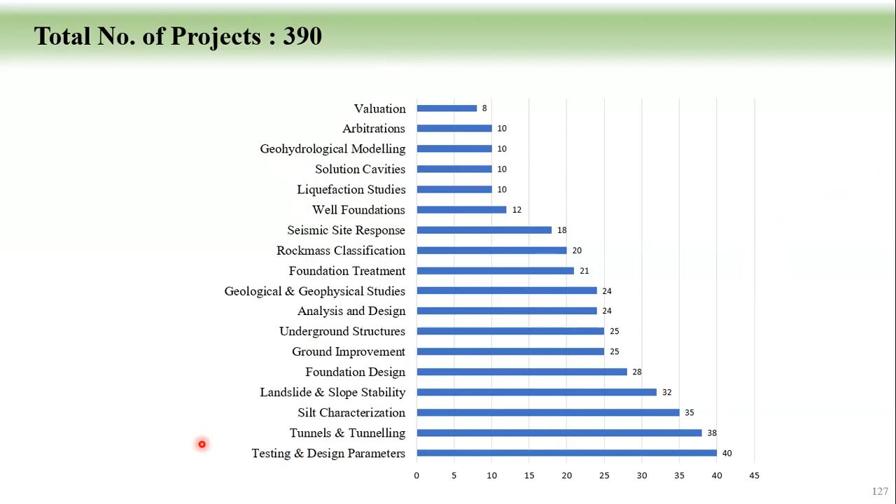This is roughly giving how our time is actually spent on different projects. I'll take maybe 4 projects here: stability of Chenab bridge abutments, Subansiri powerhouse slope stability, integrated effect of seismic and rainfall landslides in the Himalayas, evaluation of bored tunneling practice for Delhi Metro, and coupled hydromechanical modeling of slopes in the upper catchment of Beas in the Himalayas.

I will see it there, but I will definitely be closing it by 1 o'clock. So that ends my presentation in this segment. And if required, I will take it up in the second segment, or maybe we can close it there with this.

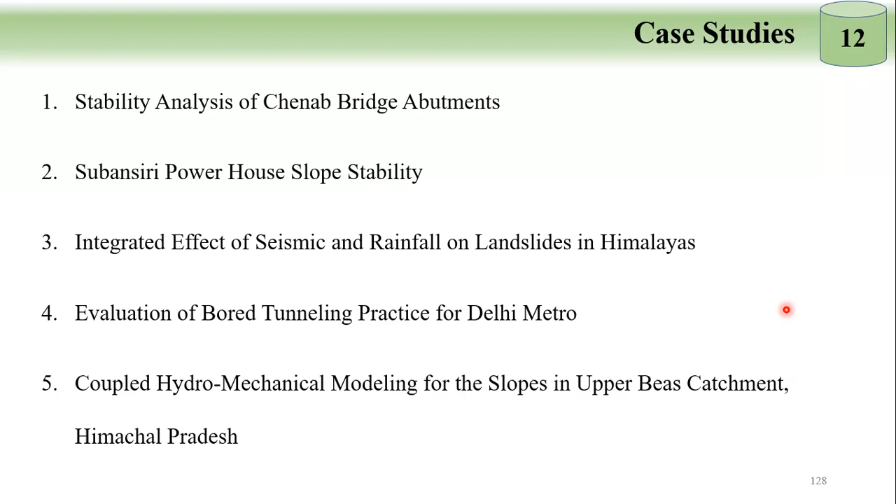So these are the case studies. Case studies are always very interesting. As you know, the Chenab is our mighty river, and across that, a bridge is supposed to be constructed by the railways.

The valley is getting connected with the train from Jammu to Baramulla. In between, you have Banihal to Baramulla where trains are already running. But from Jammu to Banihal, in between, you have this river called the Chenab. Across that, you need to have a bridge.

So this is the Laole end, and then this is the Katra end. From Jammu is this side, and when you come through a tunnel, you will be entering into the bridge. There are hundreds of bridges and hundreds of tunnels being constructed here.

This is the mighty river Chenab, and a tributary to the Chenab is the Anjikhad. The Anjikhad valley is also this - it is a tributary to the Chenab. Here also, you need to have a bridge.

Originally, both are actually planned as arch bridges. In arch bridges, you don't have any supporting piers, and there is a viaduct part, and then there is an arch. The arch foundations are coming here, which I call P50, and then this is P40.

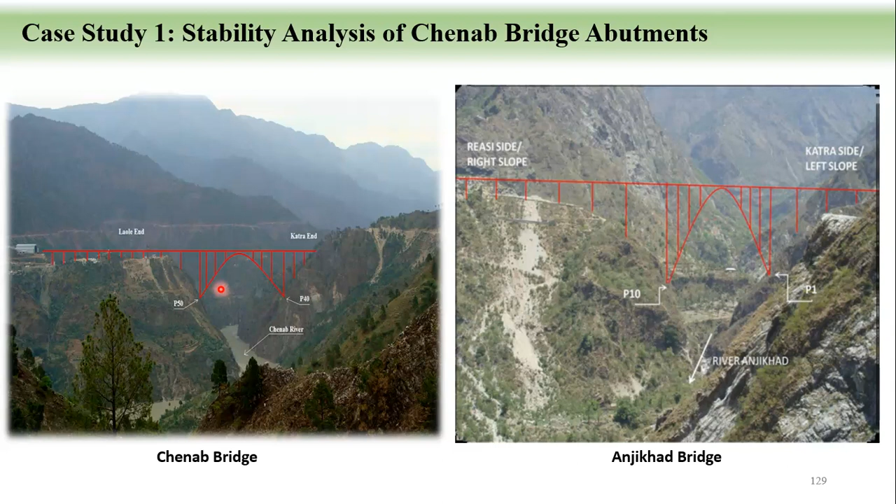Both the bridges were originally planned, but this bridge is now a cable-stayed bridge - they made it that way. I'm not going to talk about the Anjikhad, but I'm going to talk very briefly about the Chenab.

So that's what actually the Katra, Jammu-Katra route is, and that is the Chenab crossing. This particular bridge is coming here. And I also said that the Banihal off route is still yet to be opened. Hopefully, if these two bridges are done, this will be a continuous journey from Jammu to Baramulla, cutting across.

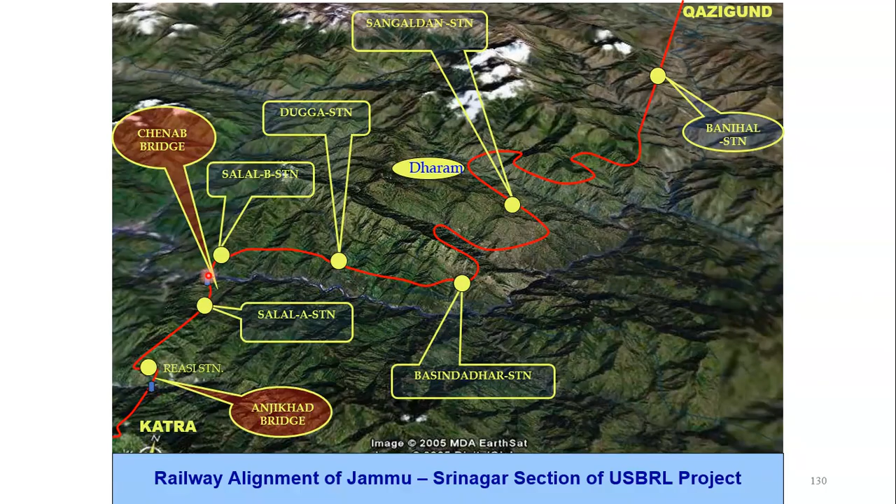So the specialty is this. You see the Eiffel Tower, it is about 324 meters, and this bridge is even higher than the Eiffel Tower. From one end to the other, it is almost 1.5 kilometers.

From abutment to abutment arch abutment, from there to there is a little more than half a kilometer, that is 505 meters, which is the width here. The total height up to the water level is 359 meters. It's mind-boggling, even compared to the Eiffel Tower.

Some of you might have seen the Eiffel Tower in Paris, and that is only 324 meters, while the deck to water level here is going to be 359 meters. Imagine traveling on the valley and looking down 359 meters, it is a thrilling experience.

So this is going to be the highest arch bridge in the world, and the second highest is going to be the Anjikhad bridge. Both these bridges are very unique.

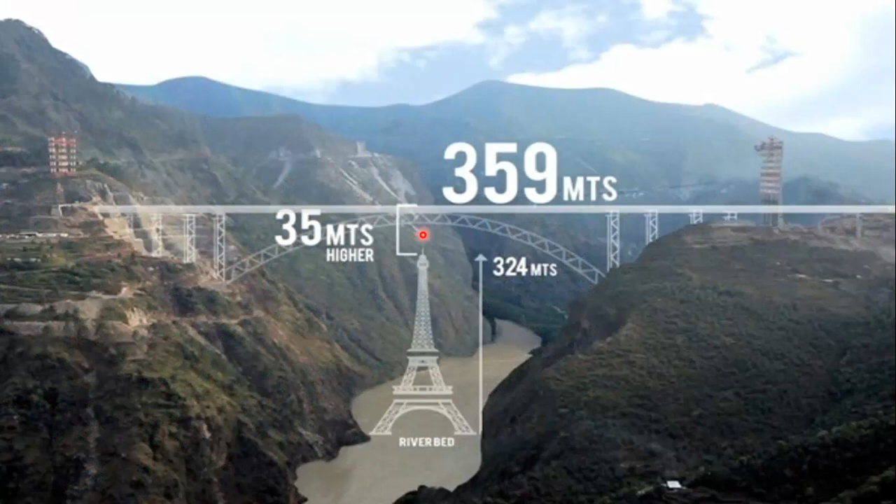Now of course, the earlier diagrams are all hypothetical, architectural renderings, because the bridge is not yet fully completed, and I will show you the present scenario. But when we enter, this is the scenario.

It is a viaduct part, on the right side the river is going down, and the arch is going to come from there to there, something like that. There are drifts which are actually created, and we captured what the bottom formations look like. This is the downstream side, and on the downstream side, the foliations of this rock are visible.

The rock present is dolomite, which is magnesium calcium carbonate. It's a very good rock, but it has a lot of foliations.

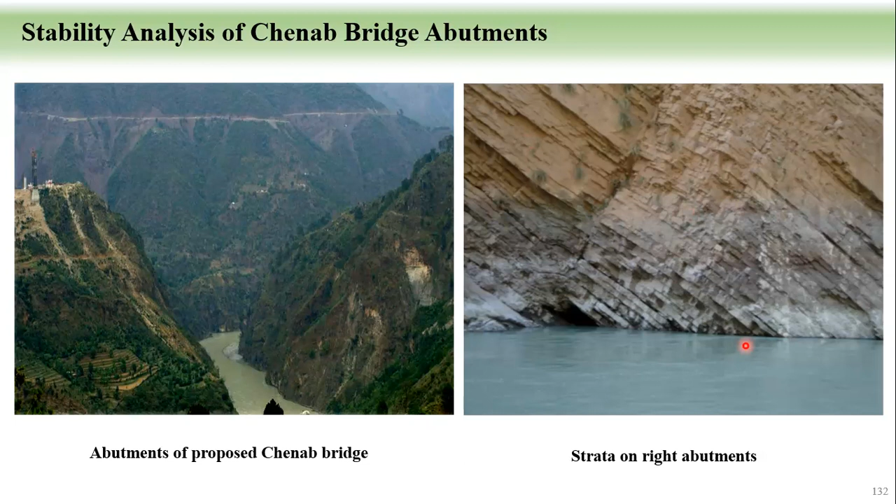As I said, the foliation plane is one joint, then J2 and J3. This is one set of joints, this is another set of joints, and each will be playing a different role. It is very rough, so the friction will be very high here, whereas J1 is very smooth.

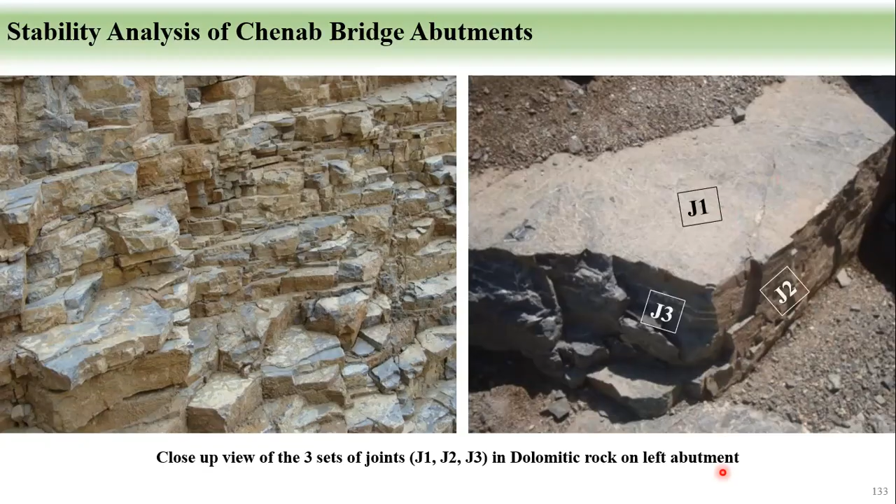The issue here is there was a controversy when the bridge construction was actually going on in full swing in 2008, and suddenly it was halted because somebody said the bridge is unsafe.

The global stability of the slopes was not done through discontinuum mechanics. Those knowing numerical methods know there are two branches: continuum mechanics and discontinuum mechanics. In continuum, most of the time we use continuum mechanics based models like FEM, FDM, and BEM. You must be familiar with codes like Flac, Phase2, Plaxis, Abaqus. These are different numerical codes available to solve stability problems and other geotechnical issues.

We assume the joint is continuous through and through, but in discontinuum mechanics you treat the joint as not continuous, with bridges and gaps. This is discontinuum mechanics, along with DDA, discontinuous deformation analysis. This is more complex because instead of assuming one single joint through and through, here the same joint is actually cut into pieces.

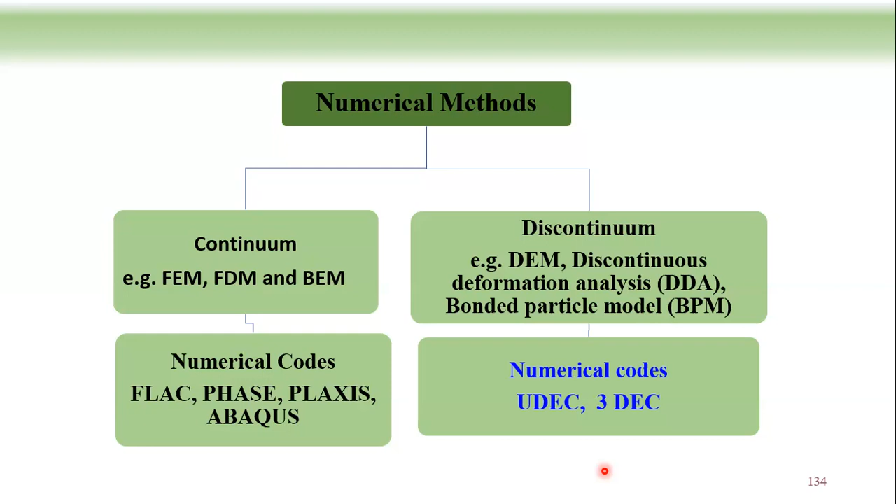So how do you do the modeling? There are numerical codes available, UDEC and 3DEC. I'm talking about the scenario in 2008 when this was needed, and we did this particular analysis using UDEC and 3DEC. The mandate was to use this code to establish the global stability, so that uninterruptedly the bridge construction would continue.

I'm only putting in a few slides since this is a big lecture. I'm not covering it in full, just to show how we can solve important national problems and issues so we get better solutions. It is an earthquake-prone area, so obviously the analysis should be done under dynamic conditions. That's what I'm saying, the joints are not continuous.

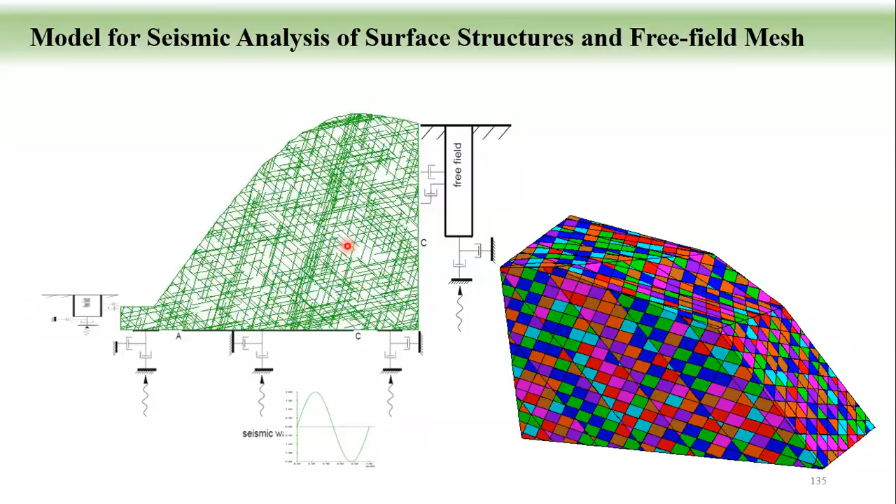There are breaks there, and the joint spacing is an issue. So you need to simulate what is exactly available at the site, and try to simulate those conditions and do the modeling.

Normally when you do the slope models, it will be 30 by 20 meter square, or 30 by 30, 30 by 40. That is the type of slope we normally analyze. But here the slope is more than 650, that is the width, and the height is almost 450.

So a 500 by 600 area you are trying to model at every location, since it is a bridge. We make a cut slope where the piers are coming, where the abutment pier is actually coming, and we put monitoring points.

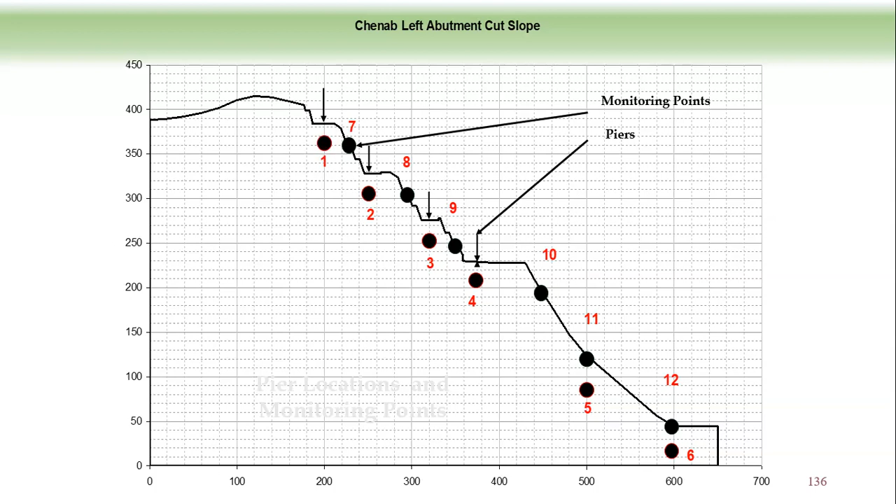These monitoring points will give you the full stress and deformation history because of the different loading conditions, not only on the surface, but at 10 meters below, thinking that when we do the foundation excavations, definitely into the rock, so 10 meters or so these foundations go. So thereby at that location, what is the condition.

So, to get some experience, we did the limit equilibrium using continuum mechanics based modeling, and then subsequently the UDEC and 3DEC modeling we did. But the main crux is getting the right parameters for the analysis.

The project authorities gave some properties, but we were not convinced with those properties. So we put in an additional 6 months to do the intensive characterization of the material under different loading conditions, which I projected earlier.

So that experience, that research, that experience of doing different things is what helps us in deciding the correct parameters.

So these are the material parameters, which are important.

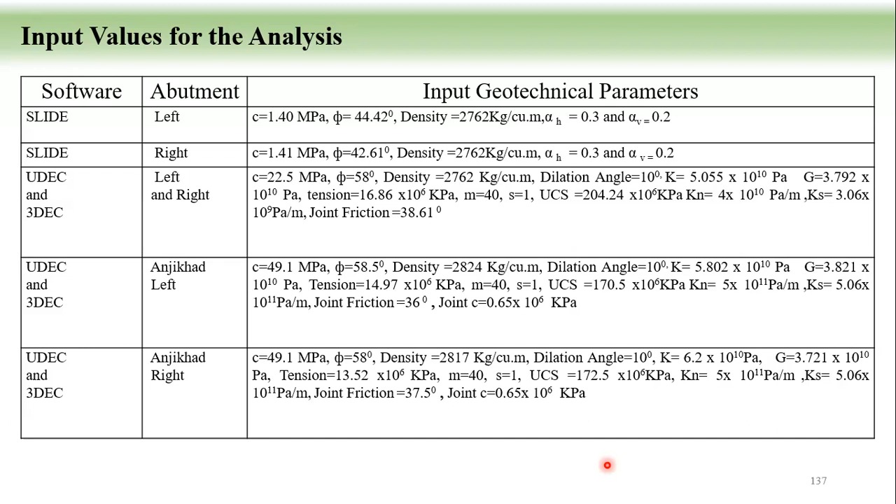To cut the story short, we did the different modeling, and the factor of safety comes to 1.96 or around.

The most critical thing is, in these cases, we have taken the complete joint conditions which are prevailing there, and also the pier loads and then seismic loads. So this case becomes very critical, and even the critical case under the dynamic condition, it comes to 1.63, so it is fairly safe.

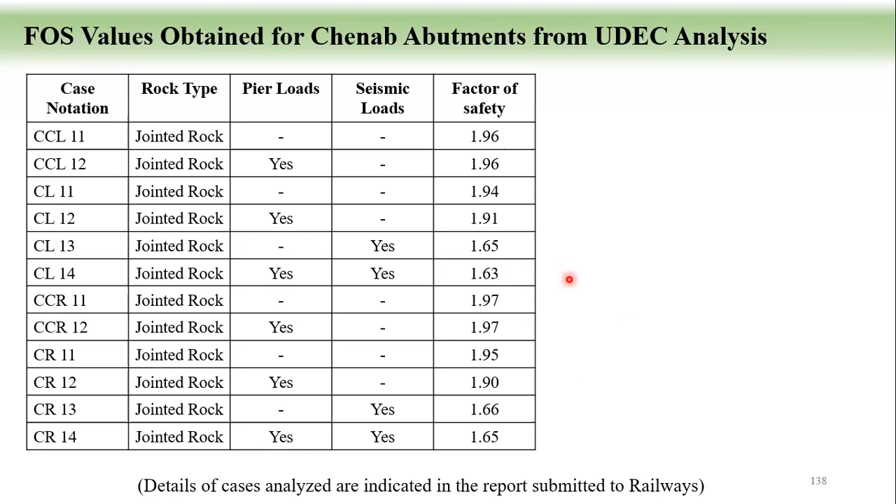Of course, the analysis is very comprehensive, that requires a separate special lecture.

Now you see that because of the analysis which has been done, the project was put online, and then the bridge is actually vigorously getting constructed. So this is the viaduct part which is being constructed.

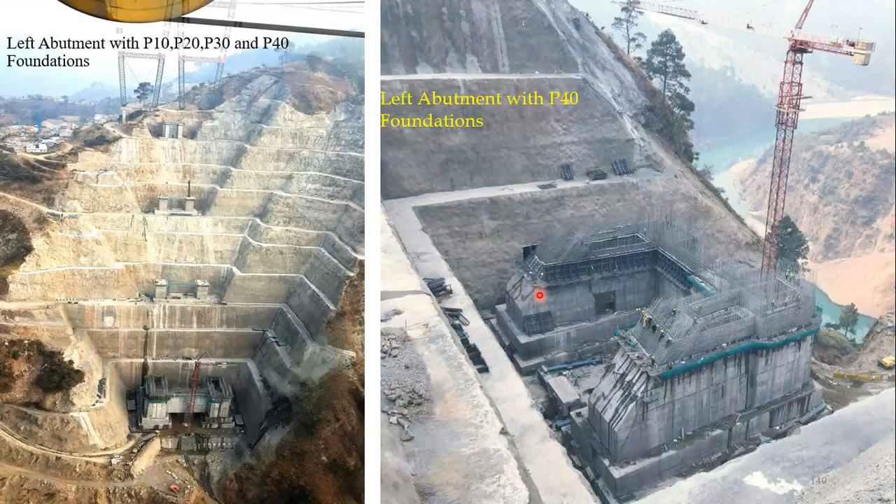These are the piers, and the abutment piers are almost 130 meters in height. The slope cutting is tremendously intense. This is the abutment pier coming here, and then the next ones, P30, P20, and the P10 piers are coming on one side, and there are others.

P40 looks like this. The dimensions of this particular excavation are 50 by 36, that is the base width of the foundations. Now you imagine the machinery needed to move, and how much cutting is actually done on this hill.

It's a mega project. So the bridge is coming up very nicely, and our services have helped this project get put on the rails. Otherwise this would have gone into major controversies.

Now, I give you a brief about this particular Subansiri hydropower project. The Subansiri River is a tributary to the Brahmaputra, and it lies between Arunachal and Assam, and it is again a mighty river.

Once the Subansiri hydro project is commissioned, this is going to be the highest hydroelectric project done by the Indian government, because the capacity is 2000 megawatts. Everything is set; only some small local issues are holding this, but I think very soon these things will get cleared.

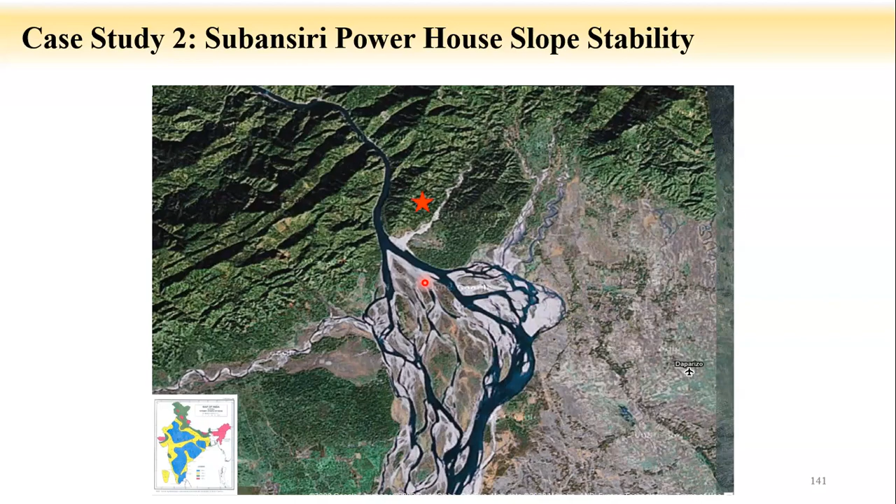The general plan, if you see it, for any typical hydel project, for the youngsters to understand: the river is actually flowing, and you are trying to construct the dam.

When you construct the dam, you will be doing the excavation, so you need to divert the water. So thereby you have diversion tunnels, taking the complete water and putting it downstream into the river, but this is getting dried.

To take further precaution, you create a coffer dam. It is a temporary dam, and another one on the downstream side. These two coffer dams completely seal the water from entering this particular location, so that the dam can be constructed. Once the dam is actually constructed and closed, these two coffer dams will go.

Then there are intake tunnels. This intake takes the reservoir water, and it will be used for running the turbines. So thereby this is a surface powerhouse.

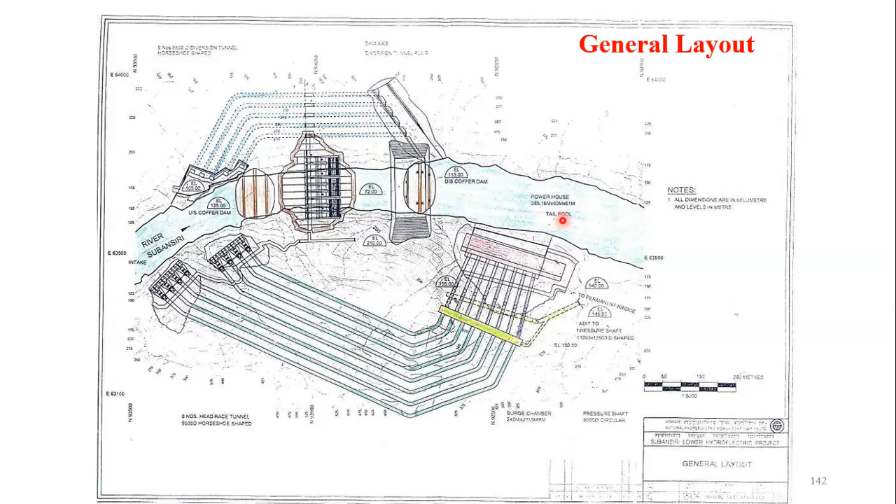Our problem is related to this. The mountains are there, the hills are there. This is such a compact, close-knitted project, and your HRT tunnels are not very far. They are very close, and by the time water comes from the powerhouse, it is already reaching the river level.

So for getting the space to construct the powerhouse, they cut the hill. Cut the hill with properly engineered slopes, and the original profile is that. But then they cut that, and then they put the shotcrete, the rock bolting, etc. It is a properly designed slope, so thereby you will be able to construct the powerhouse there.

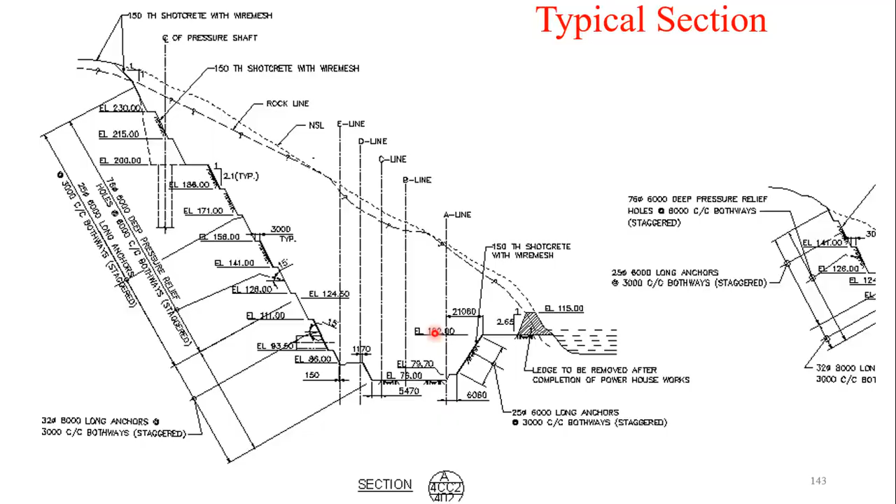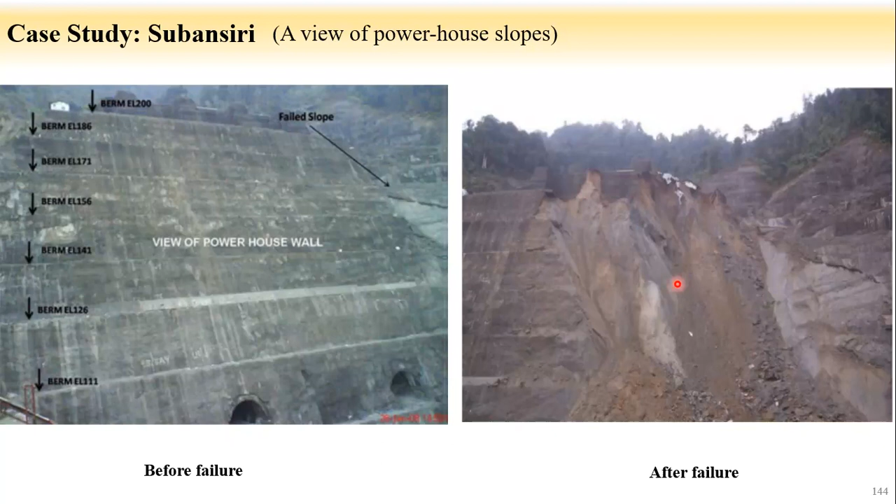But then, this is what actually happened. When the construction for the powerhouse was actually picking up, then this slope came crashing, because there are some issues. You have major fractured zones. Somehow they were not able to recognize these when the investigations were done. And after doing everything, the slope started collapsing, except only the first tunnel, but the rest of the seven HRT tunnels completely closed.

What are the causes for the failure? It's simple textbook stuff, things which we study in our textbooks. The shallow shear zone - your shear zone is running. First of all, you should identify the existence of the shear zone, and there is almost very less overburden. Unfavorable joint systems, they are all dipping towards the valley. Any slope having joints or formations dipping towards the slope is dangerous.

Heavy rainfall, excess water - what is that rainfall going to do? Earlier we discussed that it creates pore pressure. And what is the type of rock? It is Siwalik sandstone. From west to east you have the Siwalik sandstones. They are very soft, their strength is not more than 20 MPa or so, and under water the strength decreases drastically.

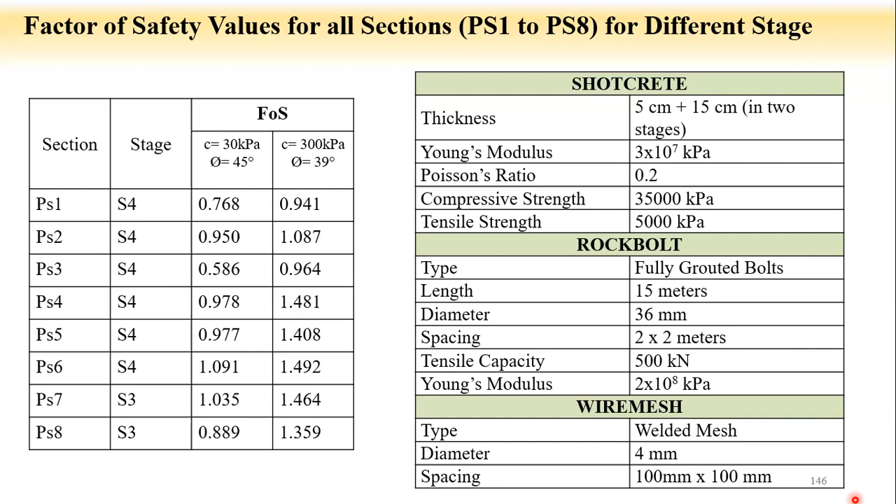Wire mesh is associated with the shotcrete. We put with or without wire mesh, we do the shotcrete. These two or three methods are good enough to do any type of underground construction or slope stabilities for most of the projects.

This area is almost 70% of the slope collapsed, and we rebuilt it by dividing into different segments and did the analysis. All these things are showing the before and after, what is the improvement in factor of safety, and then how we rebuilt it.

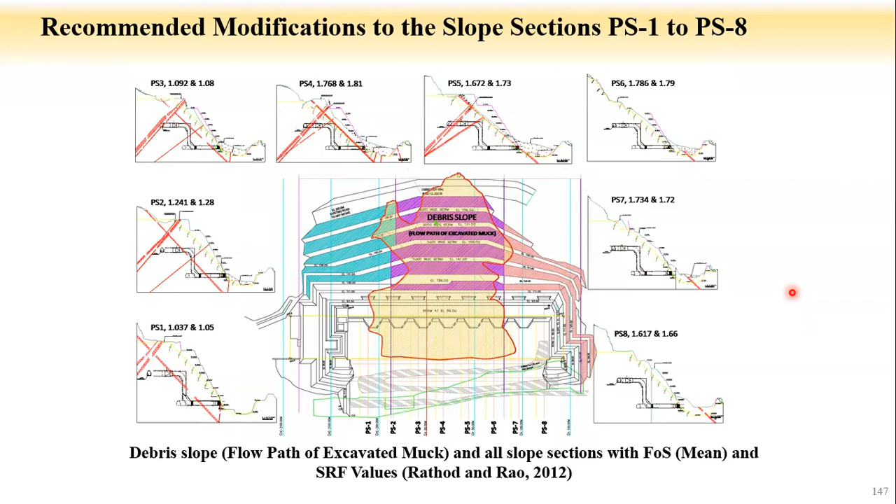This is the rebuilt slope, and now the powerhouse is done. The project is waiting for a lot of probabilistic analysis etc., because the analysis should be created in dynamic conditions, since it is in a highly earthquake prone area.

Another important thing we always say is that landslides occur because of water permeating into the slopes. So water is a culprit, definitely. Most of the landslides happen in the month of July, August, September in the Himalayas. Apart from that, earthquakes are also going to create problems.

We have earlier seen that cyclic shear testing results in easy sliding. The same thing happens if the area is also earthquake prone and the rainfall is also intense - then it becomes deadly. Major failures are taking place due to rainfall, and also if during that time an earthquake happens, then contribution from the earthquake is also going to be there.

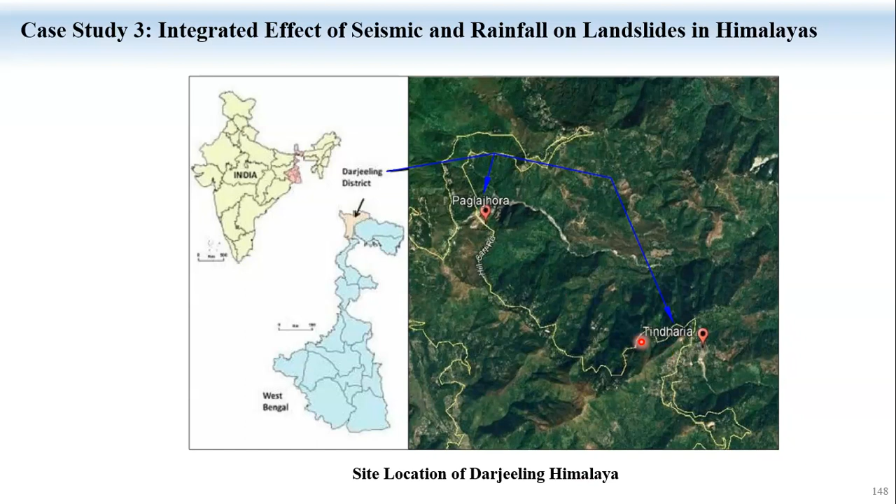One classical case is Paglajhora and Tindharia in the Darjeeling Himalayas. We took two major landslides for the study - a massive landslide, and there is a toy train, the classic Darjeeling heritage train, where the road and track are completely collapsed.

You can see it from the top - an aerial picture - and its impact is so much. There is a railway yard constructed in the 1880s or so, and that is also getting affected because of a lot of collapse.

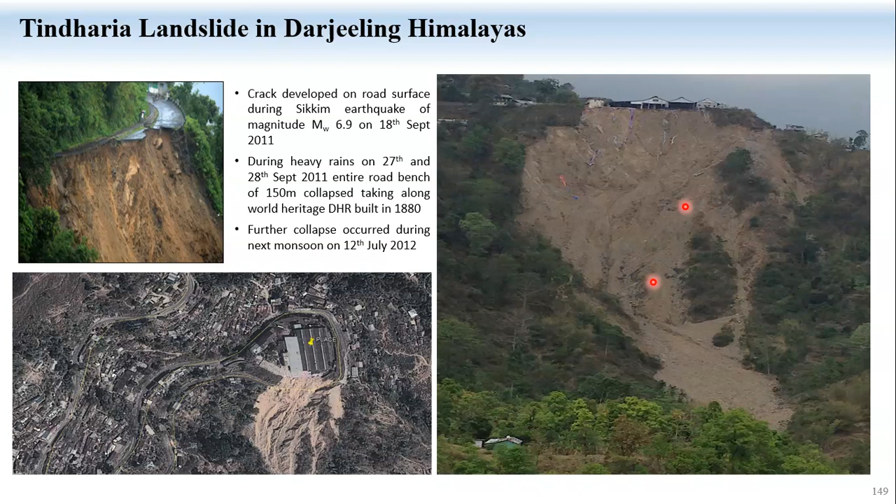How do you do it? Different material - it is not bouldery, it is not soil, it is not rock. You have some mixed type of failure modes. It is massive, and we took the complete basin and the water potential - we monitored the piezometers to get the pore pressure at the site along the slope.

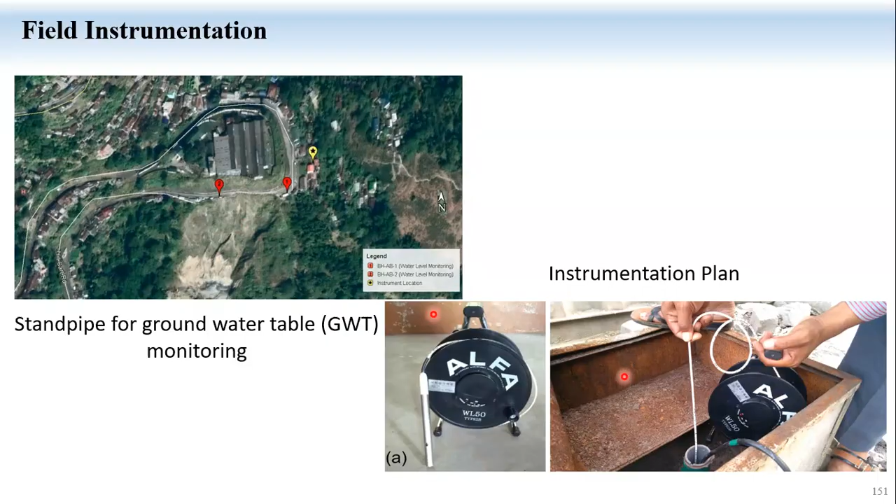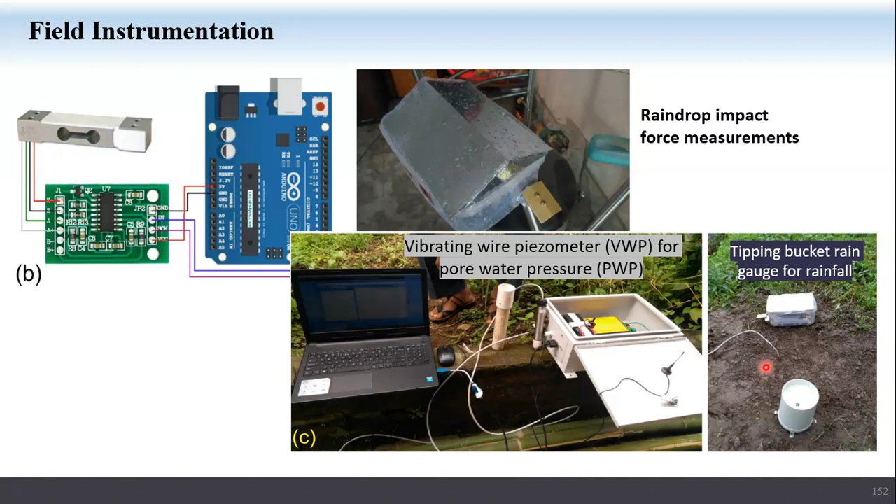For the first time, we did the analysis through this particular device, designed by our students, which can measure the impact of the rainfall - not only the intensity, but also the impact of the rainfall on the slope. This includes intensity, duration of rainfall, and the earthquake, because during this time the Darjeeling earthquake happened, which is considered significant. So we combined earthquake hazard analysis plus monitoring of the slope.

This is a very classic study, probably unique in the world, where both different factors were taken into account to create a major slope stability chart for any given condition, showing what could be the stability of the slope, etc.

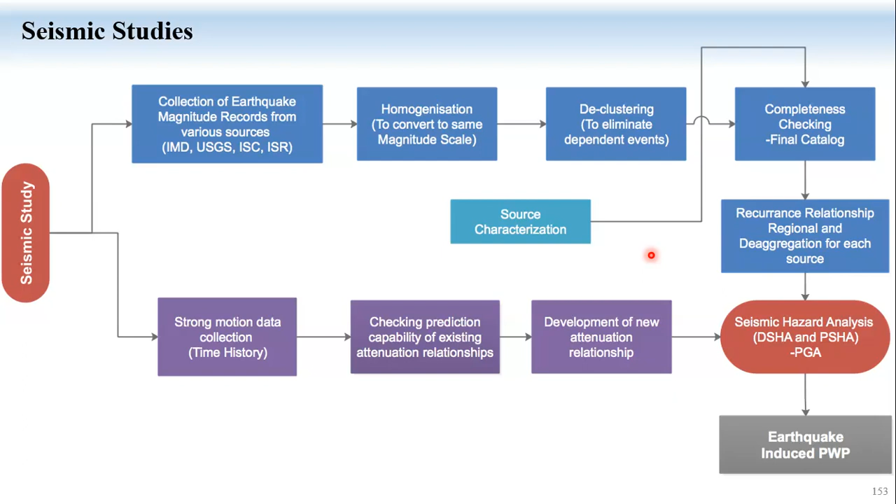The West Bengal government is separately taking up the rebuilding of this particular slope at a cost of almost 150 to 160 crores. So one single location is costing us about 150 crores to rebuild. That is the major investigation. I'm going to close this one soon.

This is a TBM, but it is done in soils, because soils cannot hold air pressure, and when you start doing the excavation, the soil is going to cave in. Thereby, to retain that, you need to adopt an earth pressure balancing system. But whereas if it is rock, even weathered rock in this portion, you have tunnel boring machines.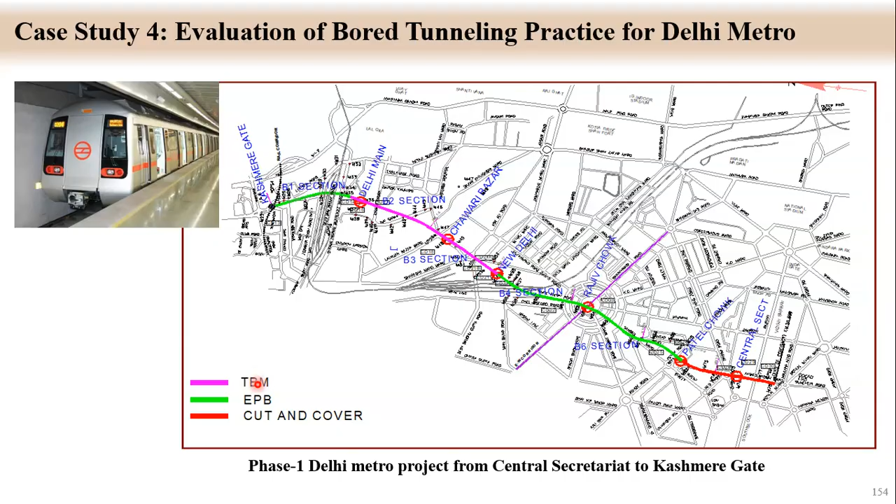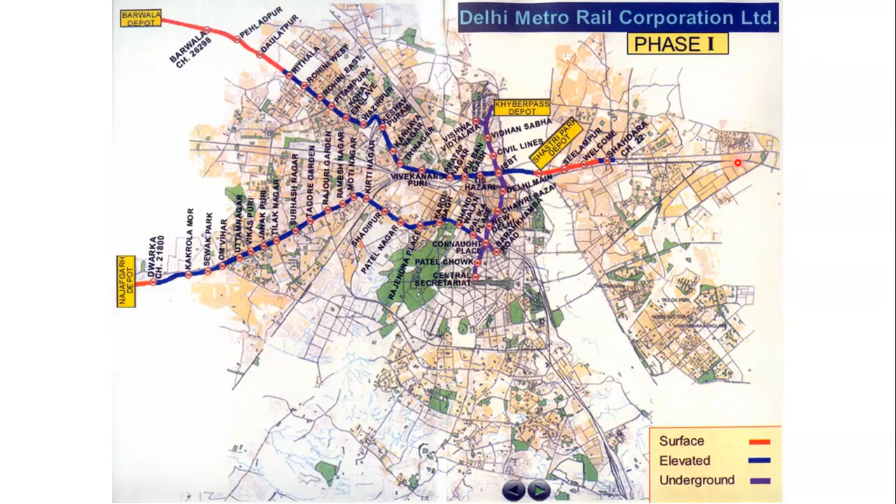So Delhi Metro, this is phase one, but if you see phase 4, which is running now, it is completely spread across all locations. The initial thing is the north-south corridor, and then east-west corridors - these were planned, and the study is for that particular phase.

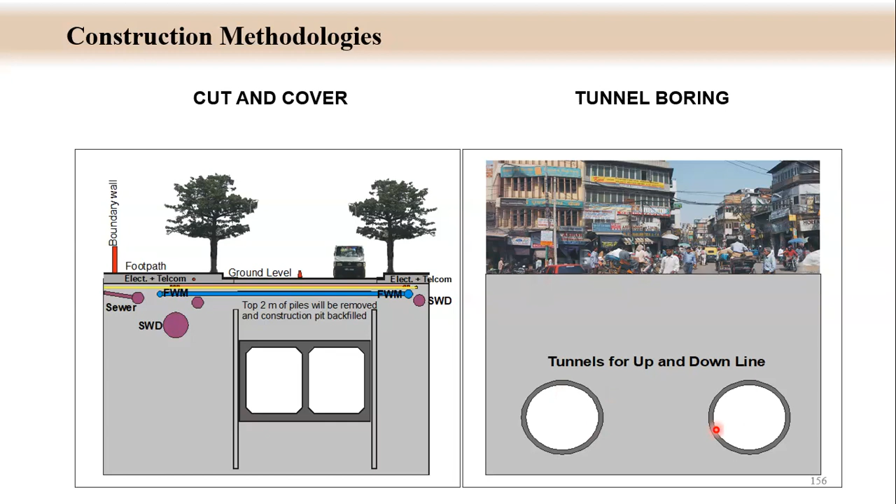Such dilapidated buildings are there, a lot of activity - you cannot actually stop that. But just 15 meters below, these two tunnels, up and down tunnels, are being done through the TBM. If you have some knowledge about Delhi...

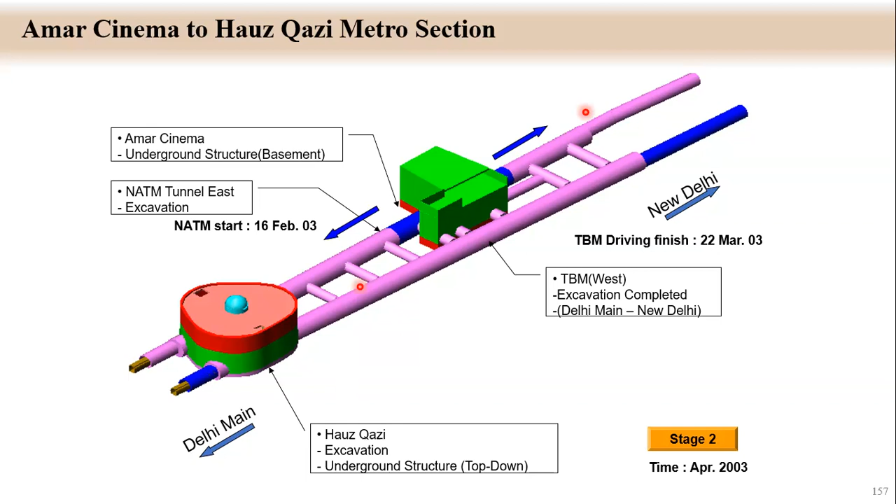That is Amar Cinema, the old Delhi side going to the main Delhi, and then there is New Delhi in between. So the TBM excavations were used there.

The material, what I said, undergoes chemical and physical disintegration. Otherwise the rock is very good rock, but because of the joints, it's all broken into pieces, and in some locations it is totally disintegrated.

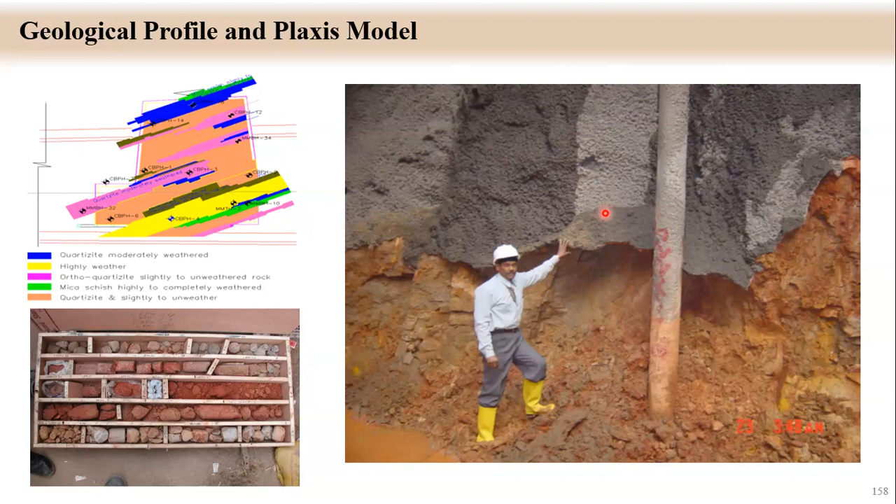And this is the shotcrete. Normally the shotcrete layer put is about 100 mm to 200 mm thick.

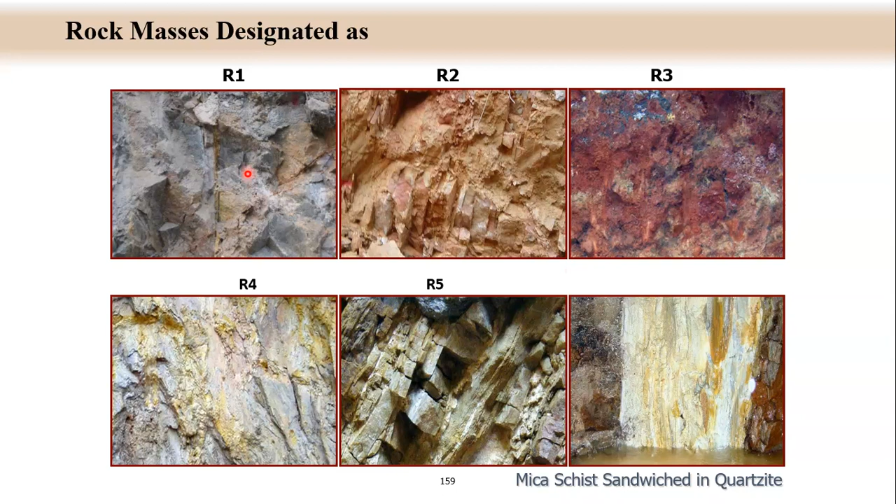We did an extensive study on the material. The material has different degrees, and then we assigned parameters for that, to do the tunneling. Since I have not actually covered that aspect in the lecture...

What we normally do is, when you do the tunneling, the face, the area you are cutting, is going to converge, meaning some amount of volume reduction is going to take place. So before putting the support system, how much volume reduction is the cut tunnel going to be subjected to? That's an important fact. The rest of the operations are actually related to that.

So that convergence of the tunnel or the face is what we call face loss. Using analytical methods, you will be able to predict the amount of convergence that is going to take place, what percentage - whether it's 1%, 2%, or 3%. If your judgment and prediction is good, then the tunnel behaves well. Also, if you are doing tunneling, it's always a problem of settlements - how much settlement is going to take place.

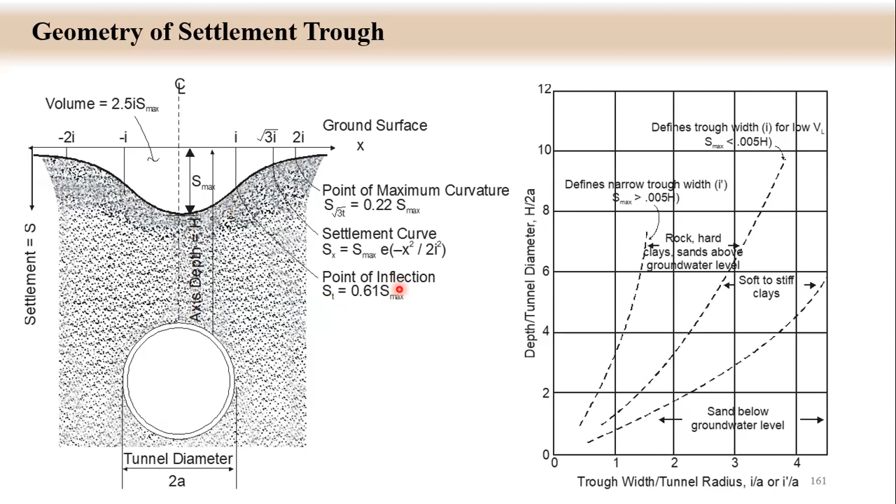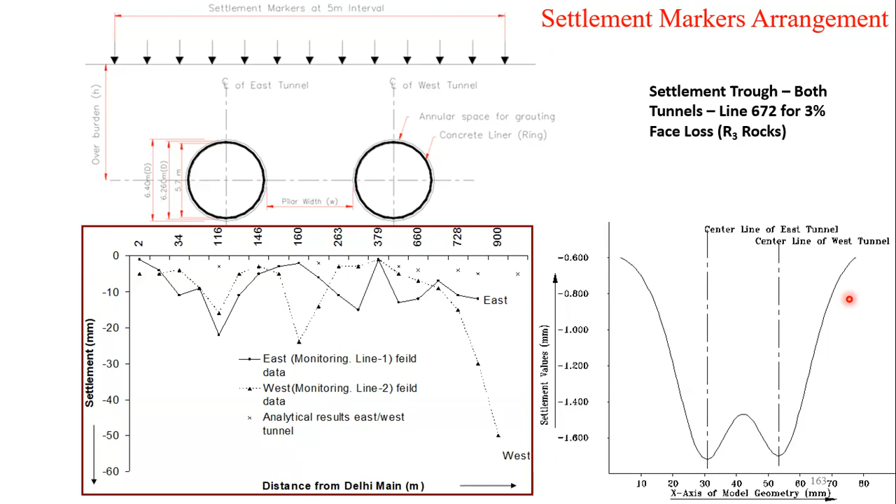Because of the settlement, convergence is also going to take place. So this is what we did in different rock conditions, and our settlement predictions are perfectly in line, which has actually helped good tunneling practice.

So I come to the conclusion of what basically I projected: the strength and deformation behavior of intact rock, anisotropic rocks, weathered rocks, and jointed rocks under different stress states, modeled through physical, numerical, and analytical approaches. So all variety of material conditions and loading conditions have been experimented on and knowledge gained.

As physical modeling requires sensitive and robust experimental facilities, we created these facilities. They are not actually off the shelf, available for purchase with just money. With very minimal money, we could create these facilities. Design and development is actually done by us through HEICO, and that company is the major supporter for us. What is it that we did?

Large scale uniaxial, biaxial, polyaxial testing equipment, servo controlled static and cyclic direct shear equipment, impact testing facility, creep testing, servo controlled high pressure triaxial testing systems, profilometer for 3D mapping, rainfall impact gauges, high temperature chambers, rock salt leaching setup, which I have not discussed here, to mention a few, which allowed us to pursue a large range of research areas over the years.

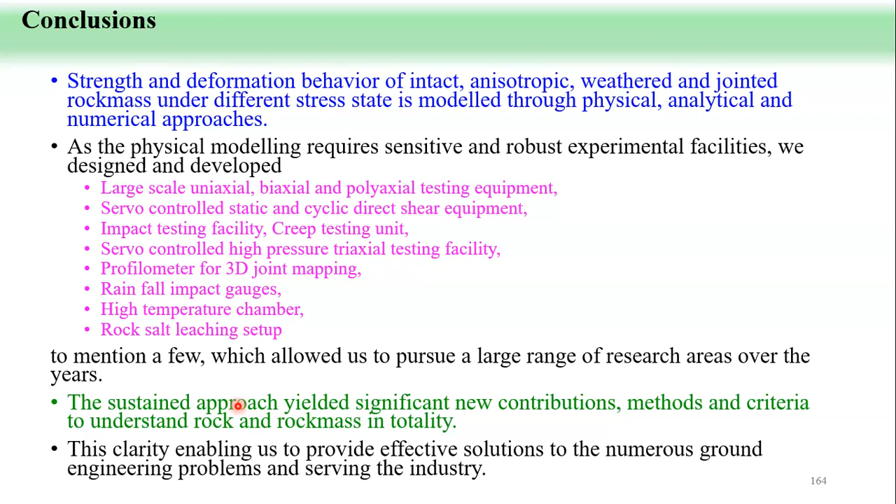Basically, we developed the capability of understanding the material under different loading conditions, and for that we developed certain equipment, through which the understanding improved, and using that understanding we tried to solve problems.

I acknowledge my teachers, mentors, seniors, colleagues, and funding agencies. Unfortunately we lost Jitendra Singh, the head of HICO, due to COVID two months back, and he was the main backbone for us in creating good equipment. And of course there are a large number of students all working in rock mechanics, and this community is doing excellent work in earthquake engineering.

You can refer to it, because this was during the 41st IGS annual lecture which I delivered at Surat, and the same article has been published by the journal. Thank you very much on behalf of IIT Delhi and Professor Alam and all the faculty colleagues.